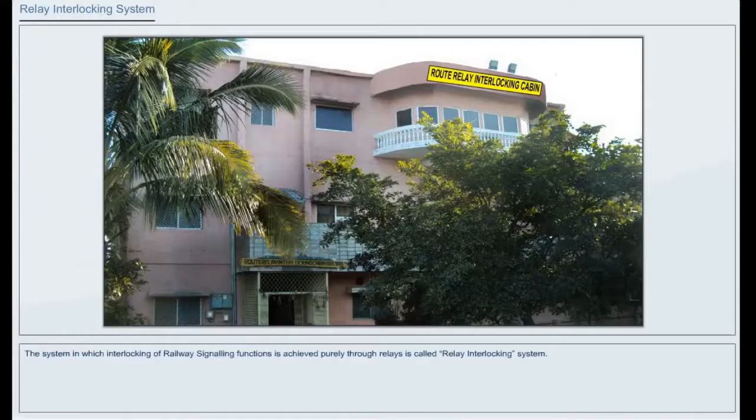A system in which interlocking of railway signaling functions is achieved purely through relays is called a relay interlocking system. Relay interlocking is to be provided as per IRS specification S36/87 Amendment Number 2.

These are classified as non-route setting type relay interlocking system, earlier known as panel interlocking or PI, and route setting type relay interlocking system, earlier known as route relay interlocking or RRI.

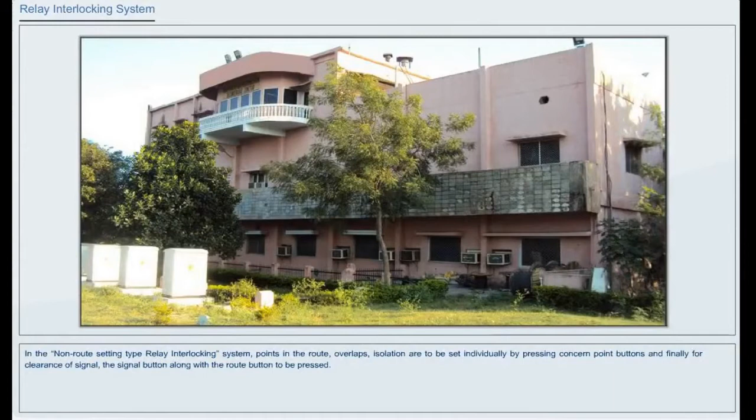In the non-route setting type relay interlocking system, points in the route, overlaps and isolation are to be set individually by pressing the concerned point buttons, and finally, for clearance of the signal, the signal button along with the route button is to be pressed.

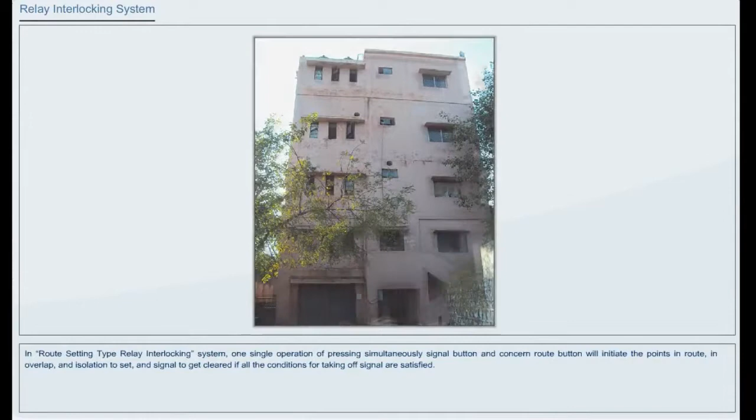In the route setting type relay interlocking system, one single operation of pressing simultaneously the signal button and the concerned route button will initiate the points in route, in overlap and isolation to set, and the signal to get cleared if all the conditions for taking off the signal are satisfied.

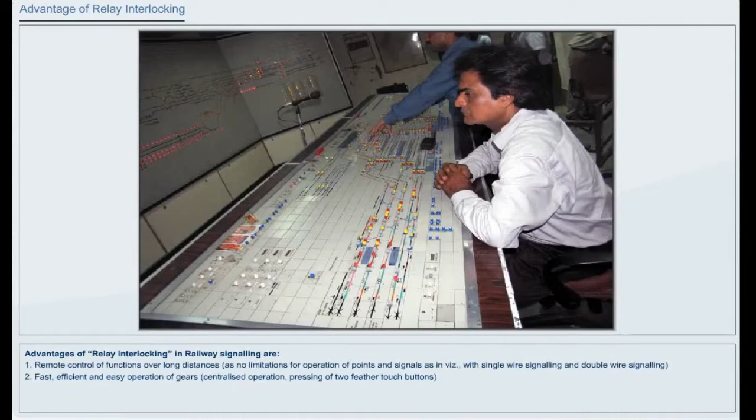Advantages of relay interlocking in railway signaling are remote control of functions over long distances, that is, there are no limitations for operation of points and signals, as vis-a-vis single wire signaling and double wire signaling. Fast, efficient and easy operation of gears, that is, for centralized operation, pressing of 2 feather touch buttons.

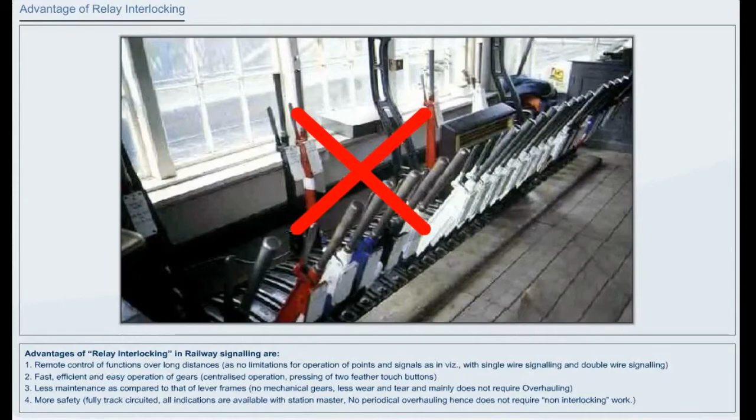Less maintenance as compared to that of lever frames. There are no mechanical gears, less wear and tear, and it mainly does not require overhauling. More safety, that is, fully track-circuited, and all indications are available with the Station Master. No periodical overhauling, hence does not require non-interlocking work.

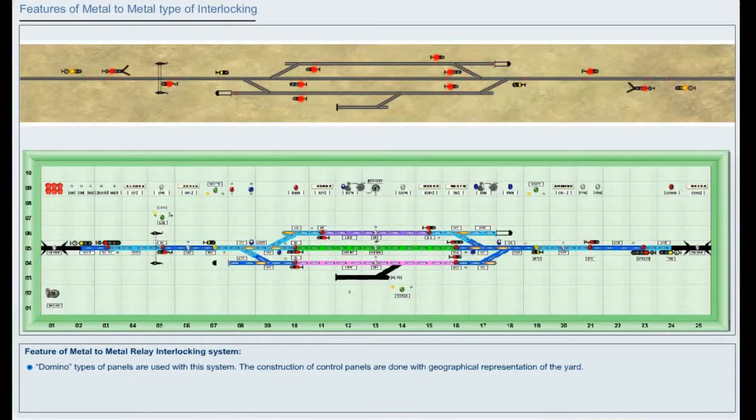Features of metal-to-metal relay interlocking system. Domino types of panels are introduced with this system. The construction of control panels is done with geographical representations of the yard by assembling small sections of domino strips fixed on a frame of suitable size.

It is based on the entrance and exit principle. The operator has to operate the signal button at the entry of the route along with the route button near its exit simultaneously. This forces the operator to face the panel and make a conscious choice of buttons. Uses self-restoring push buttons. For any vital operation, 2 buttons are to be pressed simultaneously.

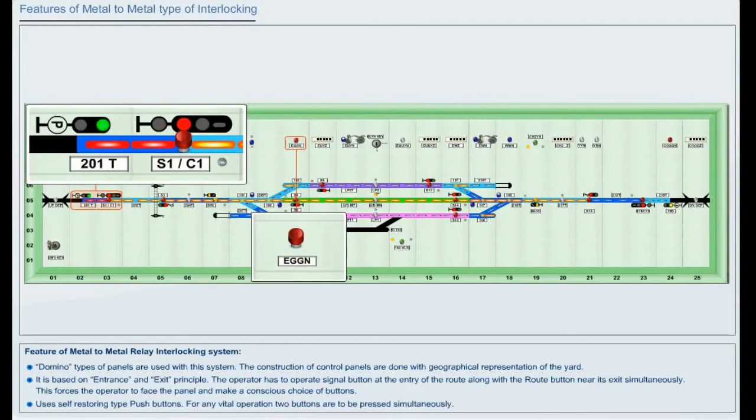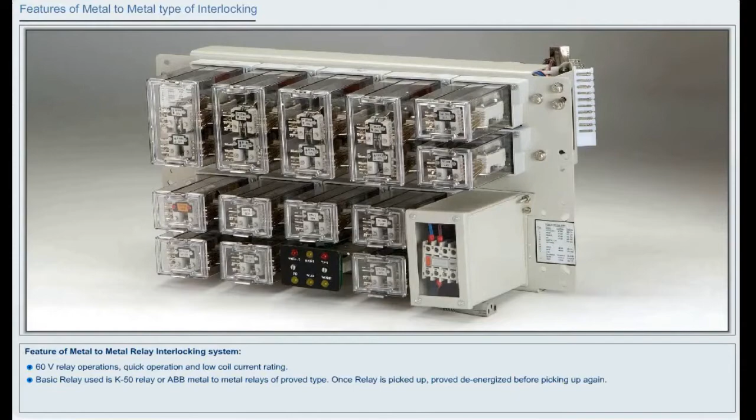60 volts relay operation, quick operation and low coil current rating. The basic relay used is the K50 relay or ABB metal-to-metal relays of proved type. Relay picked up is proved de-energized before picking up again. Uses relay groups and mechanical interlocked relays. Uses mercury type flasher relay. This is capable of working for ages.

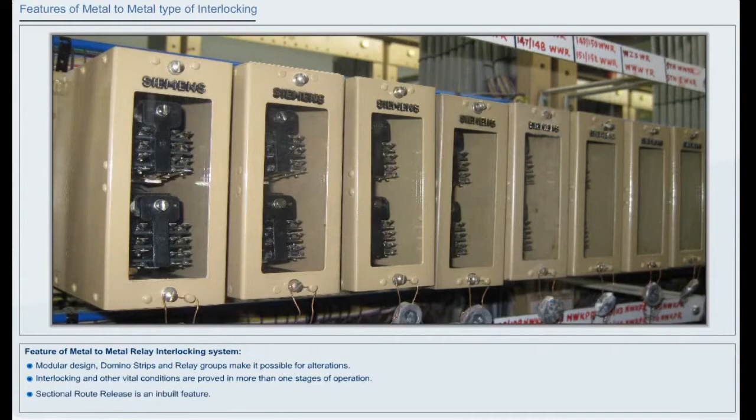Modular design, domino strips and relay groups make alterations possible. Interlocking and other vital conditions are proved in more than one stage of operation. Sectional route release is an inbuilt feature. Emergency full route release, emergency sub-route release, and emergency point operation.

Features with counters are introduced with this system. These features facilitate quicker traffic management with the help of signaling staff in times of track circuit failures. Provision of main and intermediate distribution frames for wiring connections between various relay units, relays and operating panel, as well as relays and external cables.

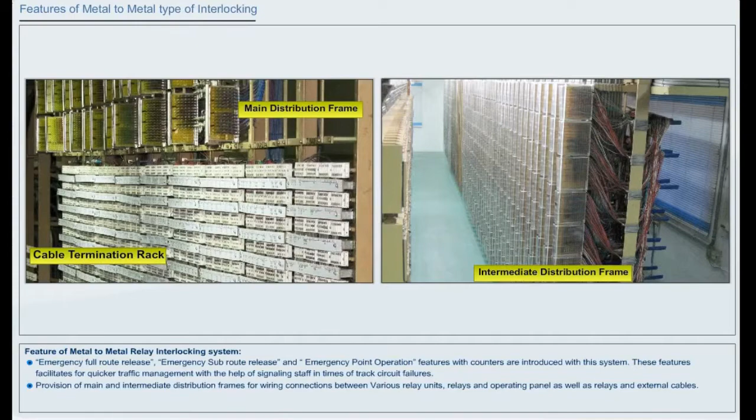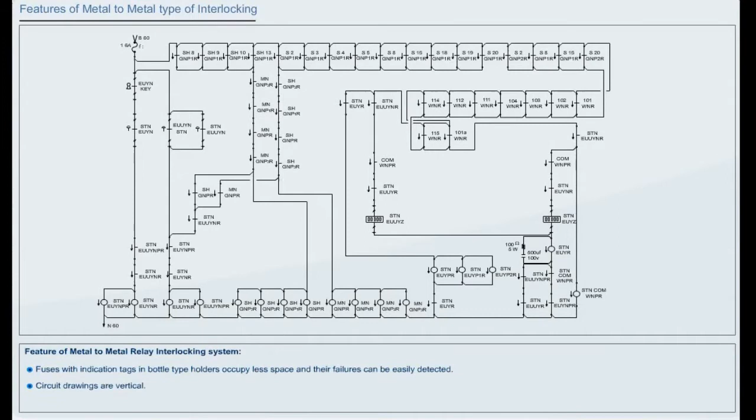All wires are terminated on tag blocks fixed on distribution frames, which saves the space required for terminations and facilitates easy identification during testing and modifications. Fuses with indication tags in bottle type holders occupy less space and their failures can be easily detected. Circuit drawings are vertical. Small in size, hence occupies less space.

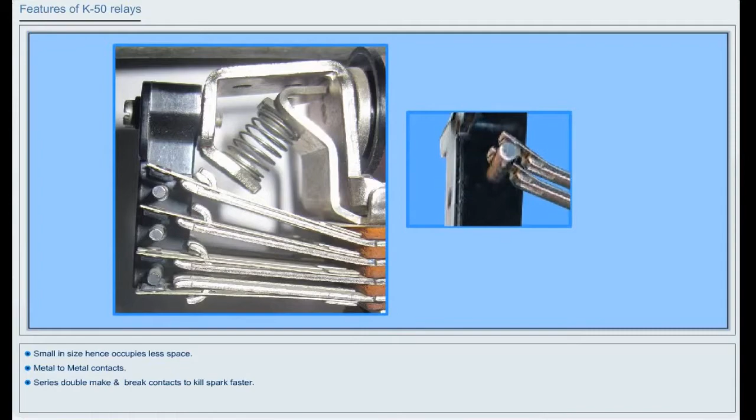Metal to metal contacts. Series double make and break contacts to kill sparks faster. Elliptical shape of contacts, hence faster heat dissipation. Fast operating time: pickup time 25 to 60 milliseconds and drop away time 15 to 25 milliseconds. Less contact resistance, 0.05 ohms, when compared to metal to carbon contact, 0.2 ohms.

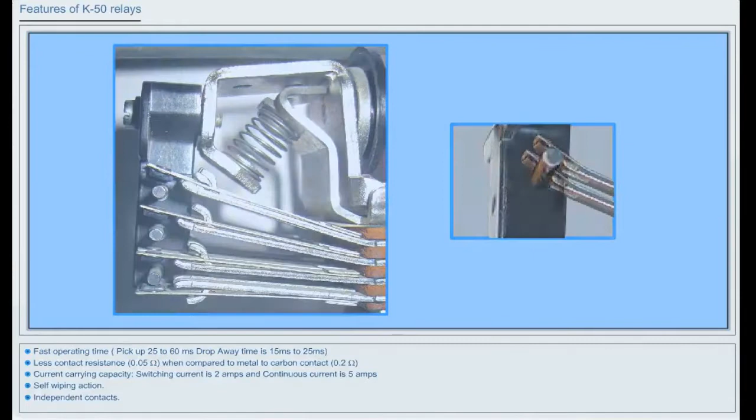Current carrying capacity: switch current is 2 amperes and continuous current is 5 amperes. Self-wiping action. Independent contacts. Code pins, 2 numbers, to prevent wrong relay insertion. Guide pins to prevent wrong direction, that is, inverted position.

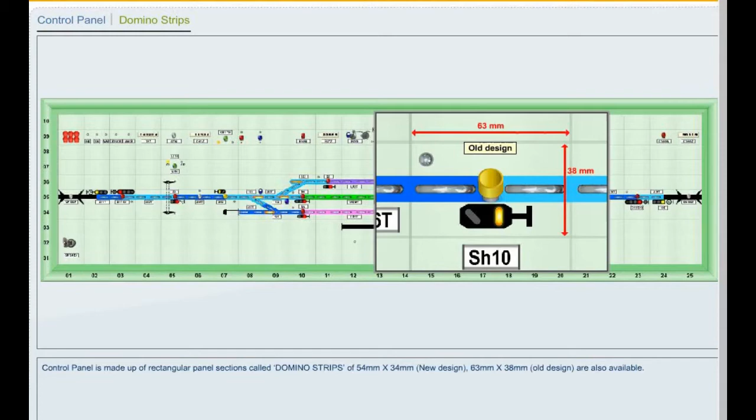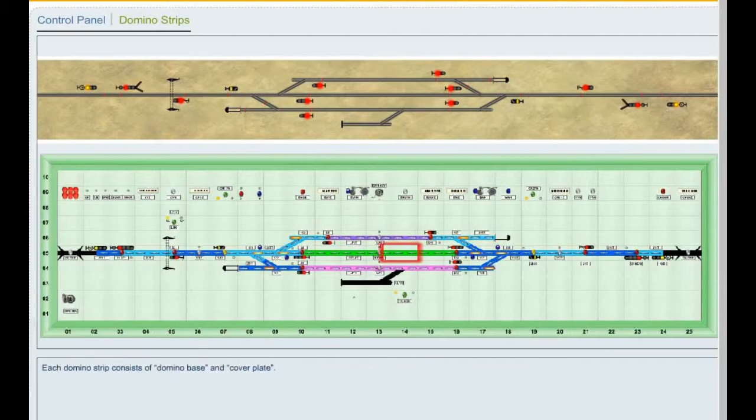The control panel is made up of rectangular panel sections called domino strips, of length 54 mm and breadth 34 mm for the new design, and length 63 mm and breadth 38 mm for the old design. Domino strips are arranged in a manner to depict the geographical layout of the yard as faced by the operator. Each domino strip consists of a domino base and cover plate.

The cover plate contains the painted yard layout portion, buttons, indications, counters and keys on top of it as required. Once all the domino strips are assembled, they will depict the complete yard layout geographically with the required buttons and others for operation. The yard layout will be painted with different colors to distinguish each track circuit portion of the yard. Usage of domino strips reduces the panel size and facilitates easy modification to suit changes in the yard from time to time.

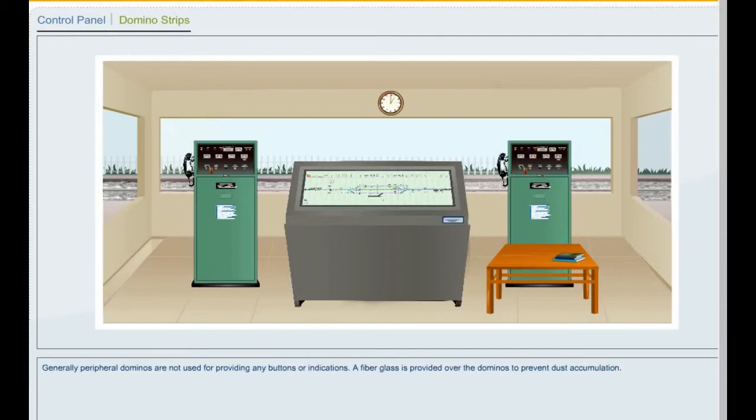Generally, peripheral dominoes are not used for providing any buttons or indications. A fiberglass cover is provided over the dominoes to prevent dust accumulation. Warning buzzers are fixed inside the panel. All the panel strip wiring is terminated on tag blocks mounted inside the panel.

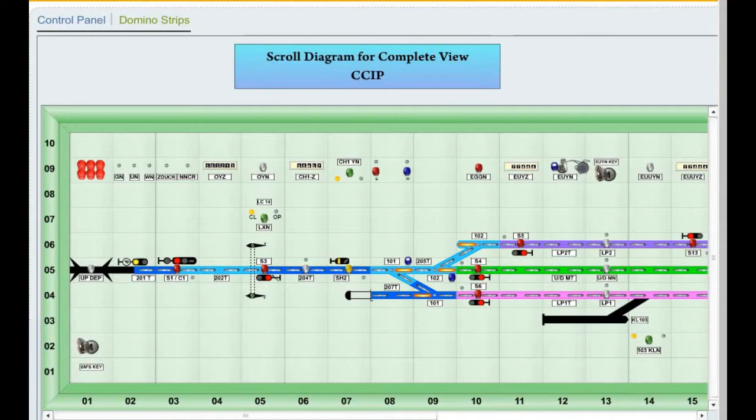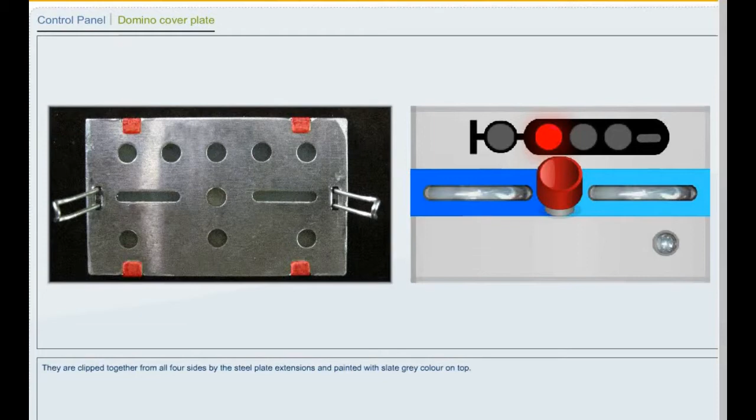It actually contains 1 steel and 2 aluminum plates. The upper plate is a steel plate and the lower 2 plates are aluminum plates. They are clipped together from all 4 sides by the steel plate extensions and painted with slate grey color on top. The top plate of the panel can be removed from its base with the help of a magnet because of its steel material.

The top plate, according to its location, may carry track, point, or signal demarcation with slit cuts to size and shape. Transparent white or green films placed between the lower 2 plates as required give the needed colors of the indications through these slits. Buttons may be fixed on the top plate in a suitable location as required. The plates can be changed or modified as per alterations effected in the yard layout at any time.

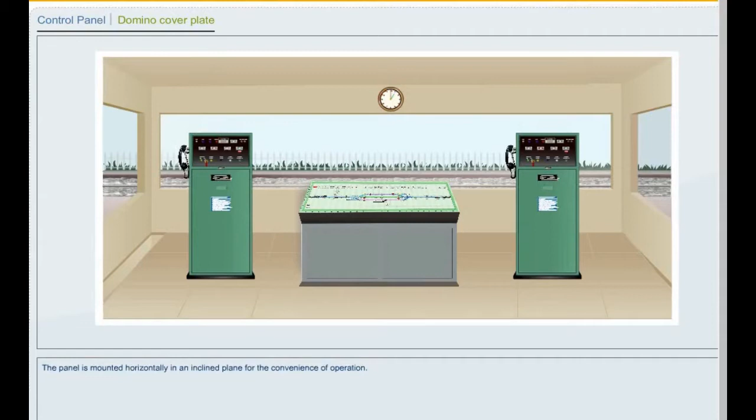The panel sections are generally assembled in multiples of 5 both horizontally and vertically as per need. The dull gray color of the panel surface eliminates undesirable reflections. The panel is mounted horizontally in an inclined plane for the convenience of operation. In case of major yards, a separate illumination diagram made up of the same sections is mounted upright above the operating panel. The operating panel may have a simple line diagram of the yard with all demarcations excluding their illuminations.

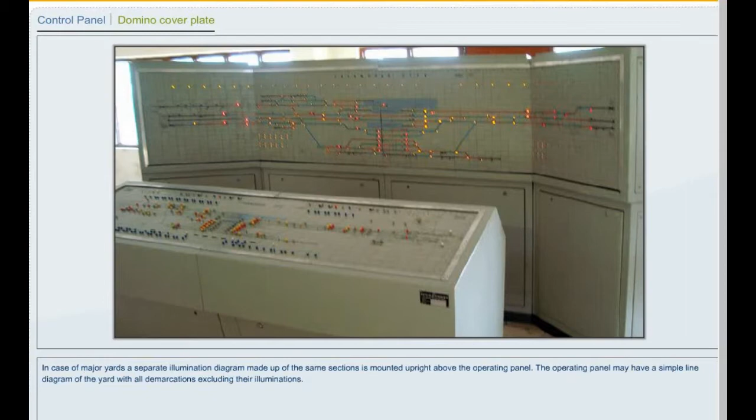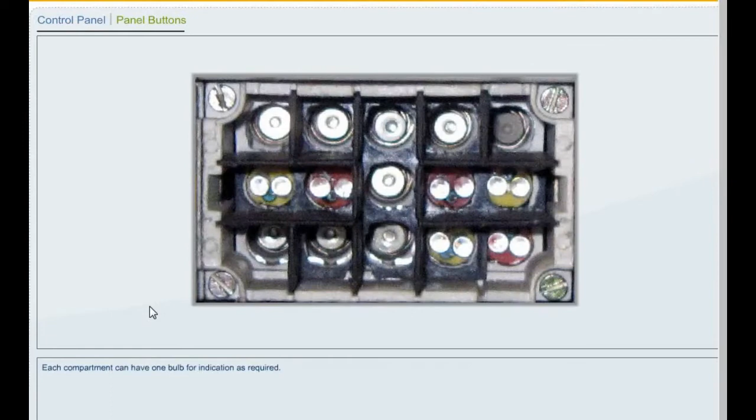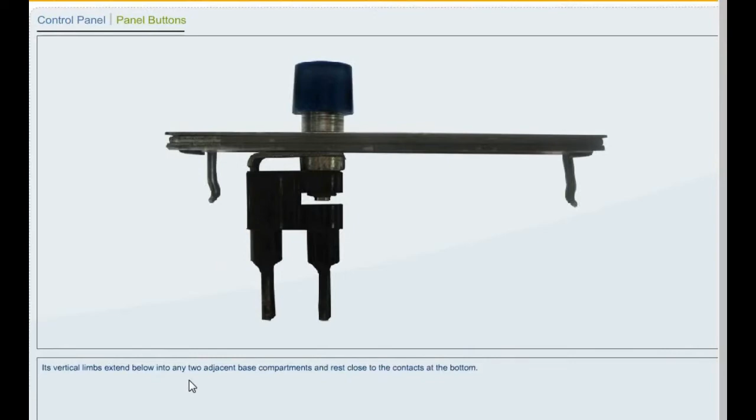A button fixed on the top plate above has a steel bridge. Its vertical limbs extend below into adjacent base compartments and rest close to the contacts at the bottom. 2 compartments are required for providing one push button for operation. These contacts are bridged when the button is pressed. The button is of self-restoring type, opening the contact normally.

All signaling functions having manual control will be operated by pressing 2 buttons simultaneously and releasing them within 10 or 15 seconds. That is, in the case of route setting interlocking, buttons shall be kept pressed till the last pair of points in the route starts operating. Main signals clear after the buttons are released, whereas shunt signal buttons shall be released after the signal has come off.

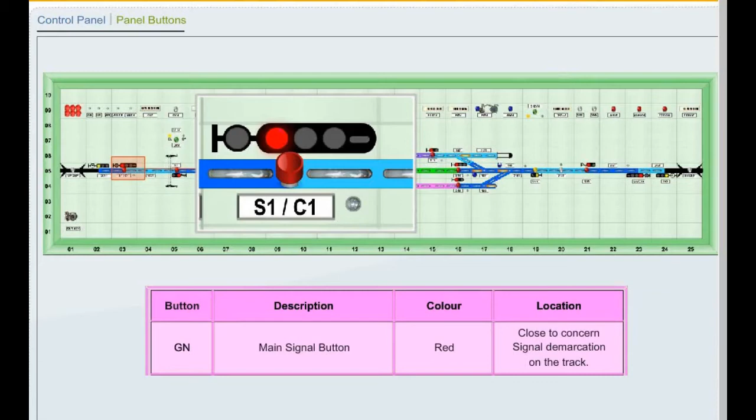GN button, that is, main signal button, which is red in color and located close to the concerned signal demarcation on the track on the control panel. SHGN button, that is, shunt signal button, which is yellow in color, is located close to the concerned signal demarcation on the track on the control panel. UN button, that is, route button, which is gray in color and located at the center of the berthing track or last control track circuit on the control panel.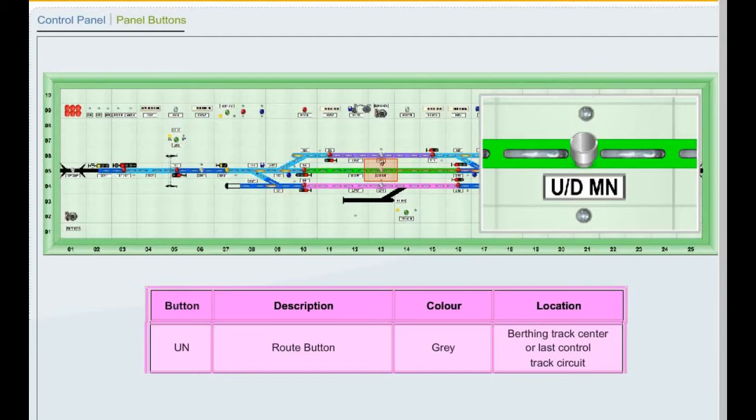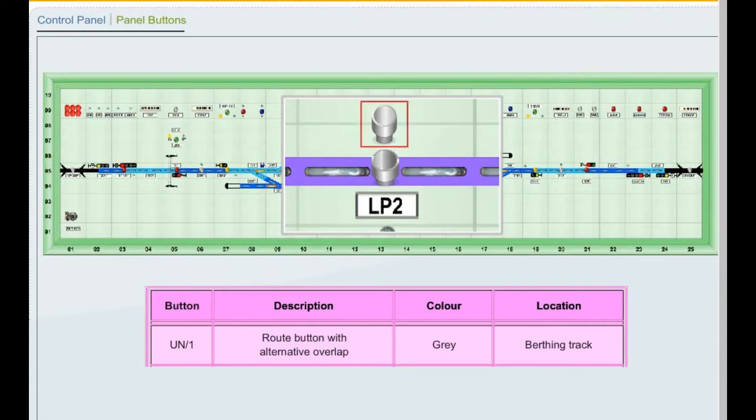UN/1 button, that is, route button with alternative overlap, which is gray in color and located at the berthing track on the control panel. WN button, that is, point button used only for point operation, which is blue in color and located close to the concerned point demarcation on the control panel. WN button, that is, point button used for point operation and also for sub-route release, which is blue with a white dot on top, is located close to the concerned point demarcation on the control panel.

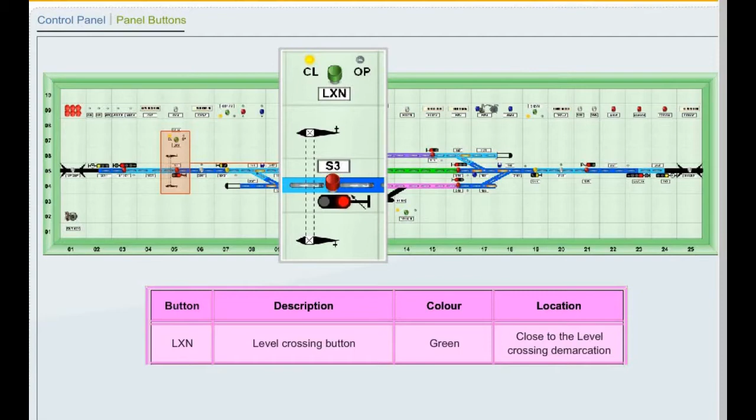LXN button, that is, level crossing button, which is green in color, is located close to level crossing demarcation on control panel. KLN button, that is Point Key Lock Release button, which is green in color, is located close to the key locked point demarcation on control panel.

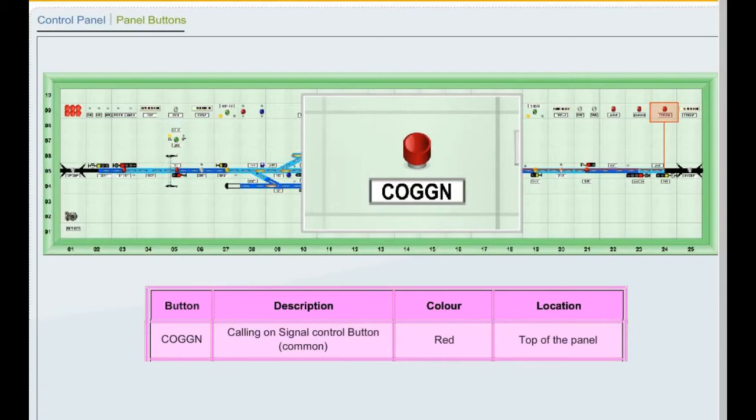COGGN button is a common calling on signal control button, which is red in color, is located at the top of the control panel. EGGN button is a common button to replace a cleared signal to on, which is red in color, is located at the top of the control panel.

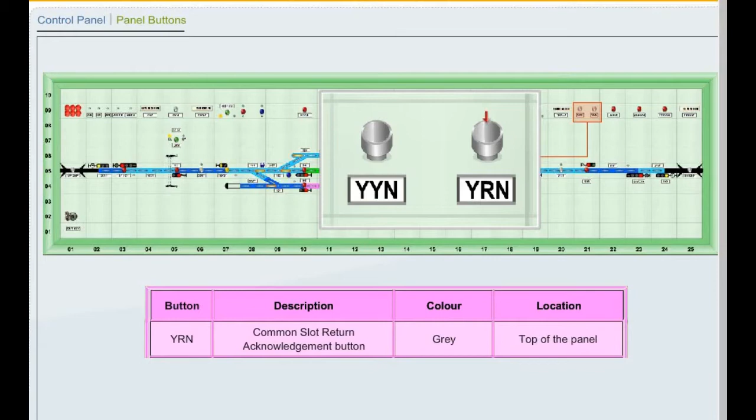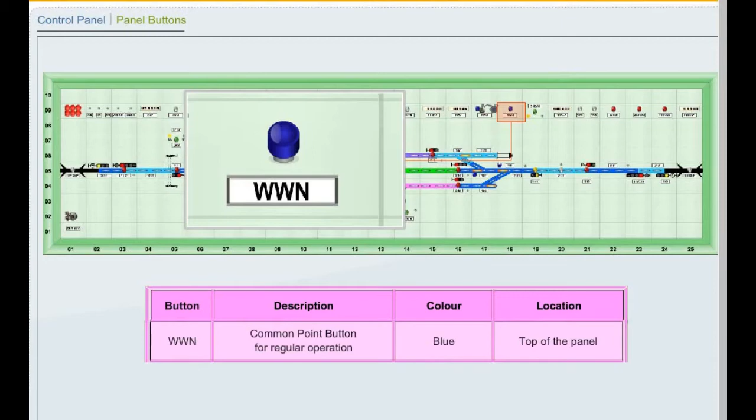YYN button is a common slot release button, gray in color, is located at the top of the control panel. YRN button is a common slot return acknowledgement button, which is gray in color, is located at the top of the control panel. WWN button is a common point button for regular operation, which is blue in color, is located at the top of the control panel.

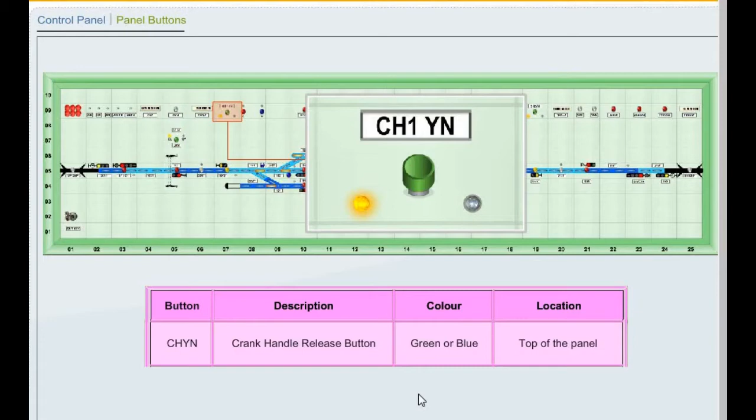EWN button is a common point button for emergency operation, which is blue in color, is located at the top of the control panel. CHYN button is a crank handle release button, which is green or blue in color, is located at the top of the control panel. CHYRN button is a crank handle slot return acknowledgement button, which is green or blue in color, is located at the top of the control panel.

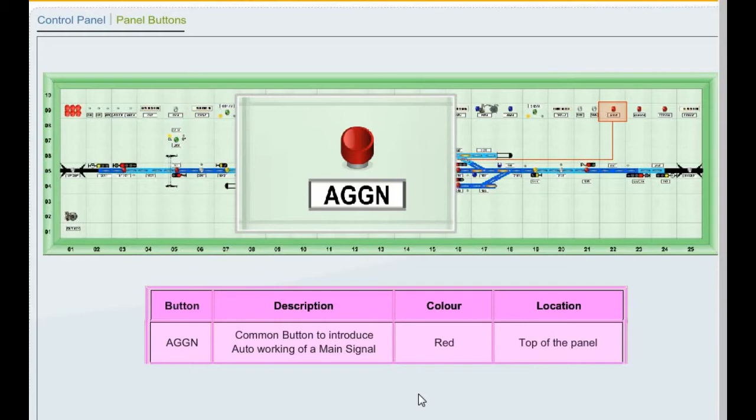AGGN button is a common button to introduce auto working of a main signal, which is red in color, is located at the top of the control panel. AGGRN button is a common button to cancel auto working of a main signal, which is red in color, is located at the top of the control panel.

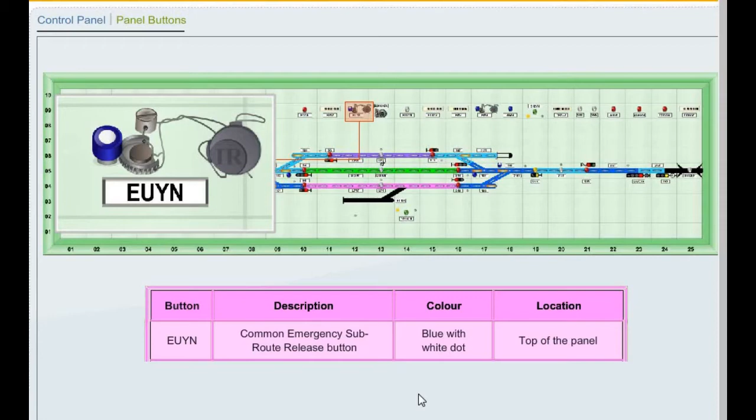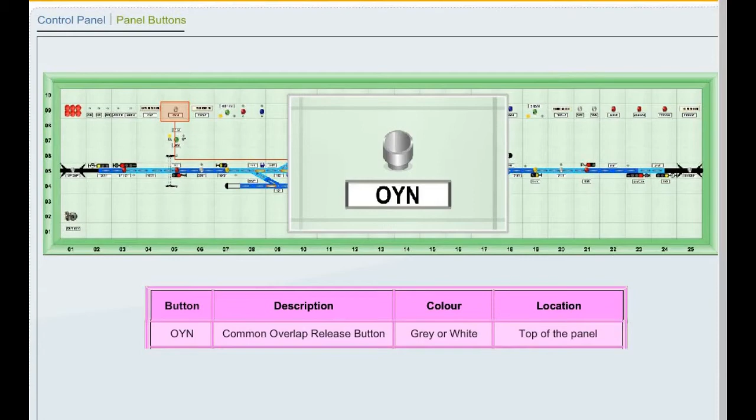EUYN button is a common emergency subroute release button, which is blue with white dot, is located at the top of the control panel. EUUYN button is a common emergency full route release button, which is gray in color, is located at the top of the control panel. OYN button is a common overlap release button, which is gray or white in color, is located at the top of the control panel.

GXYN button is a signal lamp failure alarm acknowledge release button, which is red in color, is located at the top of the control panel. WXYN button, point detection failure alarm acknowledge button, which is blue in color, is located at the top of the control panel.

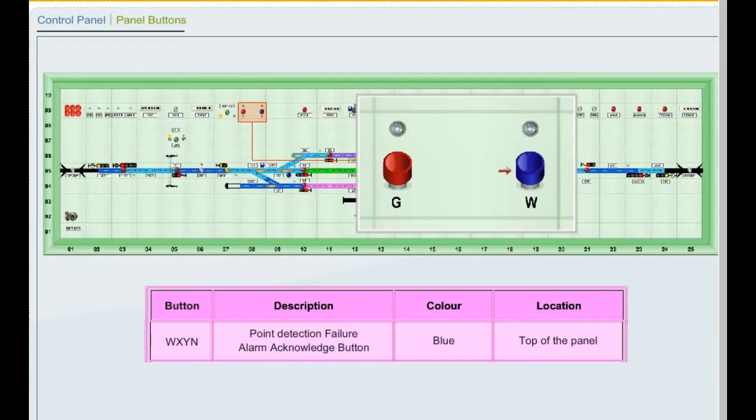Day button is a signal lamp voltage control button for daytime lighting, which is white or gray in color, is located at the top of the control panel. Night button is a signal lamp voltage control button for nighttime lighting, which is white or gray in color, is located at the top of the control panel. 1, 2 buttons are panel lamp voltage control buttons for 2 stages of light intensity, which are gray or white in color, provided for bright and dim indication on the control panel.

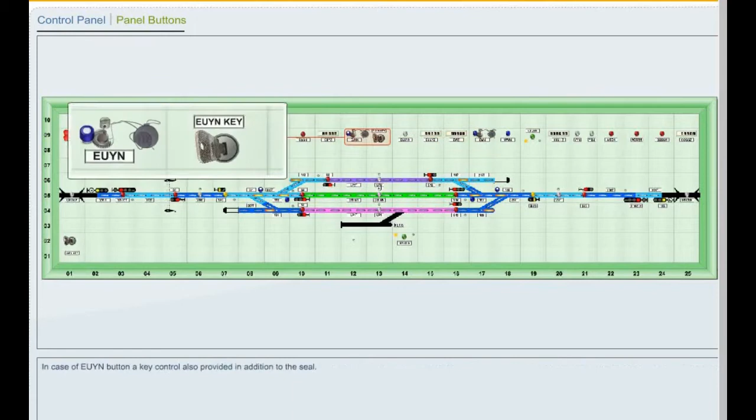Buttons EWN and EUYN are normally obstructed for operation by a sealed disc below the button. Before operation, seal has to be broken, seal wire to be removed, and the disc below the button turned to free it by the operator. In case of EUYN button, a key control is also provided in addition to the seal. After each operation, the operator has to get resealing done on the disc by the signaling staff.

Station Master Key, SM key. It enables the provision for authorized operation of the panel. This key is with the on-duty station master. When the SM's key is out, no operation is possible on panel except throwing the clear signal to on position. Emergency subroute cancellation key, EUYN key. This key is kept in custody of on-duty signal engineer or technician. Without this key, emergency subroute cancellation is not possible.

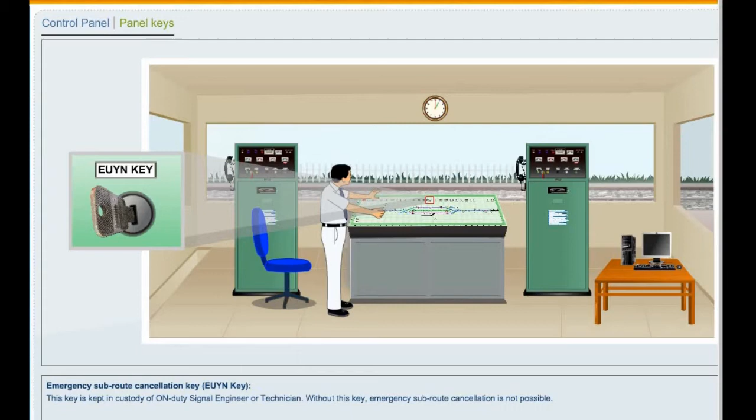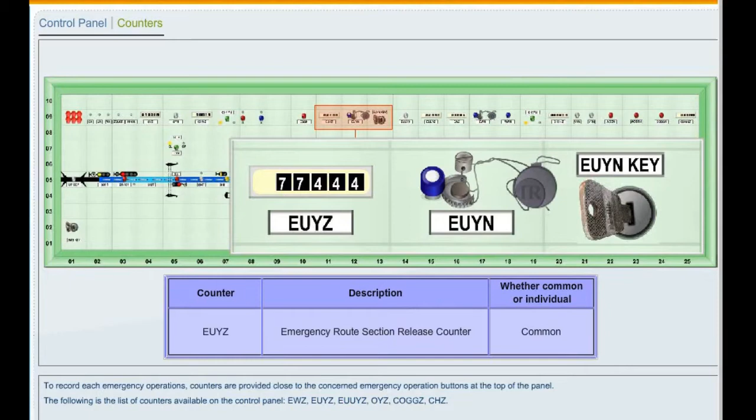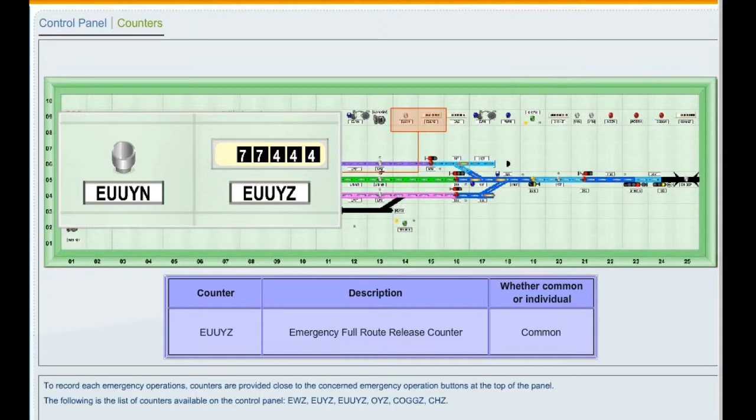To record each emergency operation, counters are provided close to the concerned emergency operation buttons at the top of the panel. The following counters are available on the control panel. EWZ counter, known as Emergency Point Operation Counter. EUYZ counter, known as Emergency Route Section Release Counter. EUUYZ counter, known as Emergency Full Route Release Counter. OYZ counter, known as Overlap Release Counter.

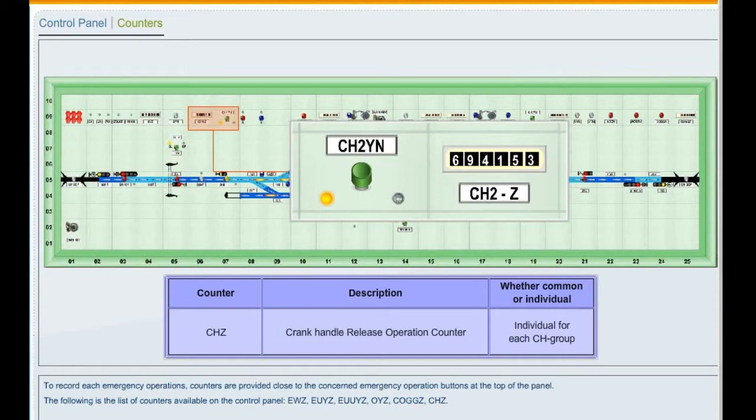COGGZ counter, known as Calling On Signal Operation Counter. CHZ counter, known as Crank Handle Release Operation Counter, is individual for each crank handle group. Some panels do not have OYN. In its place, EUUYN is utilized instead of OYN.

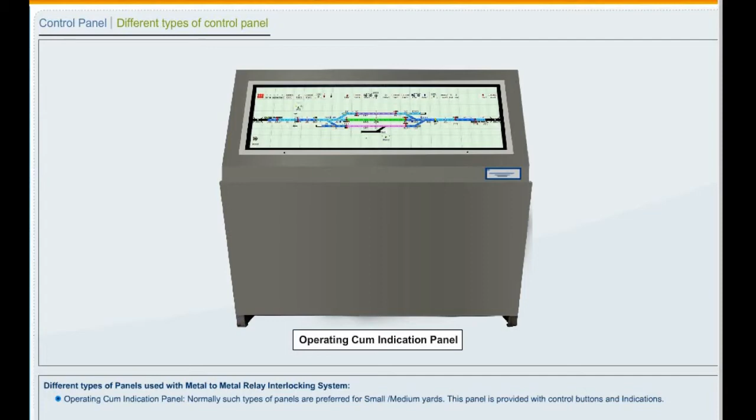Different types of control panels used with metal-to-metal relay interlocking system are operating-cum-indication panel. Normally, such types of panels are preferred for small or medium yards. This panel is provided with control buttons and indications. Indication panel, operating panel, maintenance panel.

Normally, such types of panels are preferred for bigger yards. Indication panel is provided for clear visibility of indications. In bigger yards, it is provided vertically in a semi-hexagonal shape to cover visually more area in a short span.

It is associated with a separate operating panel located in between the indication panel and the operator. It is provided with buttons, keys, counters, etc. used for operation on a simple and relatively small line diagram of the yard.

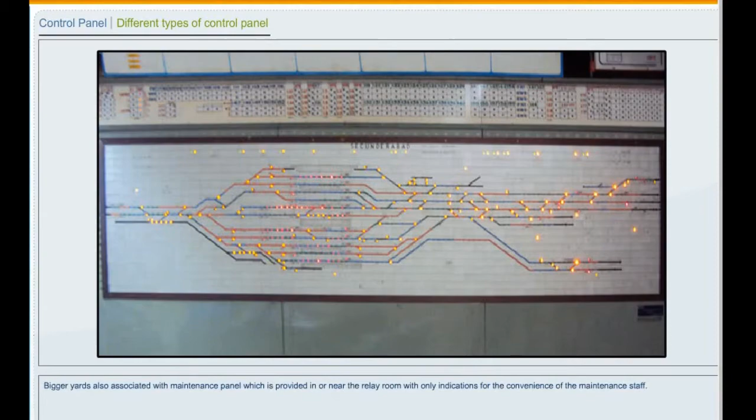Bigger yards are also associated with a maintenance panel, which is provided in or near the relay room with only indications for the convenience of the maintenance staff. Control panel with indication lamps. In this panel, its indications are illuminated with indication lamps or LED lamps.

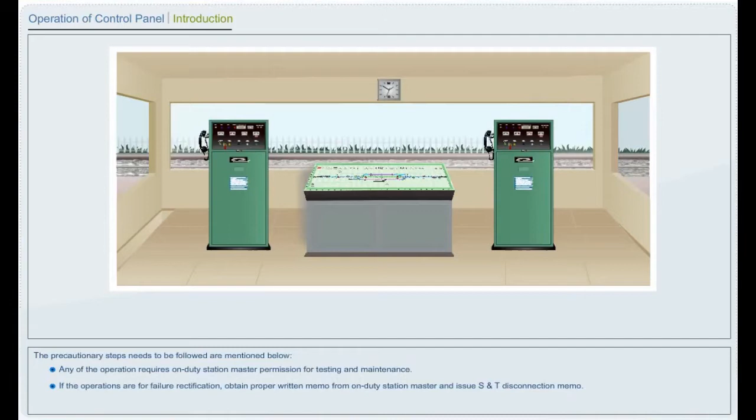Introduction. The precautionary steps that need to be followed are: any of the operations requires on-duty station master permission for testing and maintenance. If the operations are for failure rectification, obtain a proper written memo from the on-duty station master and issue an S&T disconnection memo. For any operation, ensure the SM key is in.

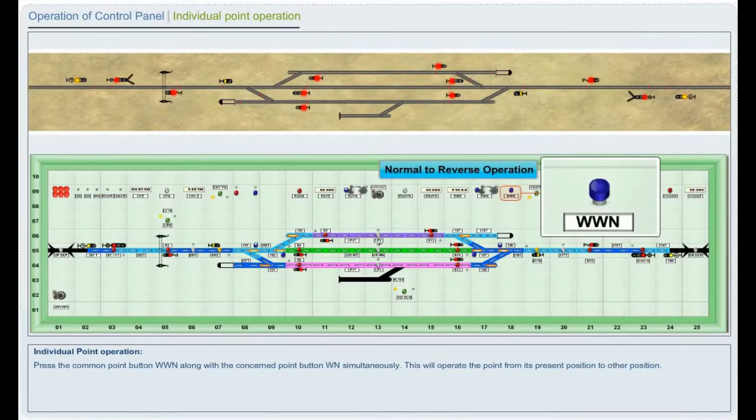Individual point operation. The procedure that needs to be followed for individual point operation is: press the common point button WWN along with the concerned point button WN simultaneously. This will operate the point from its present position to the other position. Now, press again the common point button WWN along with point button WN to operate the point from reverse position to normal position.

Emergency point operation. The steps that need to be followed for emergency point operation are: Step 1. When the point zone track circuit has failed, after ensuring non-occupation of track circuits, break the seal on the disk beneath the emergency point operation button EWN and turn it to free EWN.

Step 2. Press the emergency point operation button EWN along with the concerned point button WN and release to operate points from present position to reverse position. Step 3. Press the emergency point operation button EWN along with the concerned point button WN and release to operate the point from one position to the other. During every emergency point operation, counter EWZ will register this operation by increasing by one number.

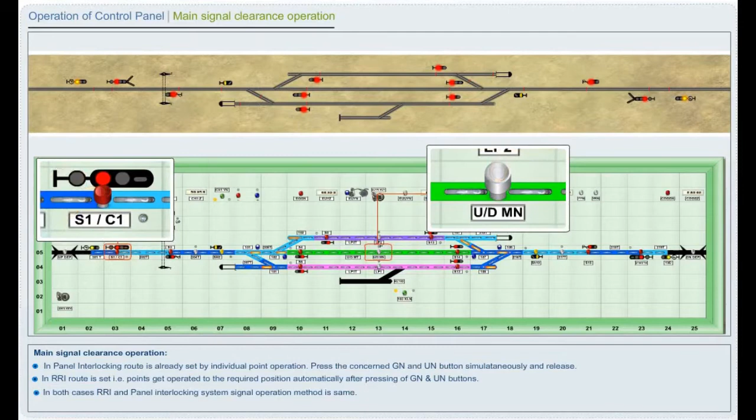Main signal clearance operation. The procedure that needs to be followed for main signal clearance operation is: in panel interlocking PI, the route is already set by individual point operation. Press the concerned signal button GN and route button UN simultaneously and release. In route relay interlocking RRI, the route is set, that is, points get operated to the required position automatically after pressing of GN and UN buttons. In both cases, RRI and panel interlocking system, the signal operation method is the same.

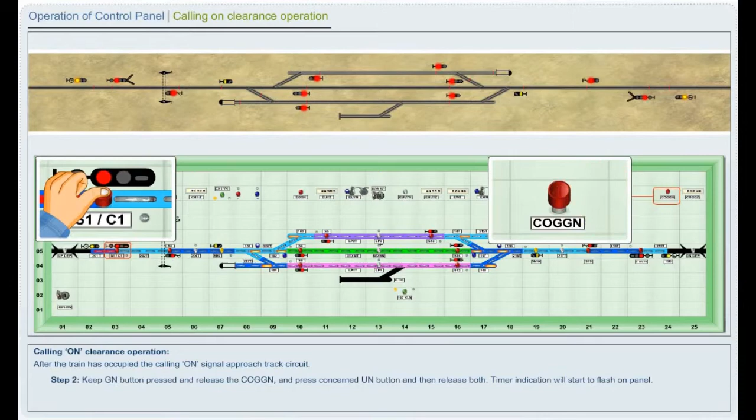Calling on signal clearance operation. The steps that need to be followed for calling on clearance operation are: Step 1. After the train occupies the calling on signal approach track circuit, press signal button GN along with calling on signal button COGGN. Step 2. Keep signal button GN pressed, release the calling on signal button COGGN, press the concerned route button UN and then release both. Timer indication will start to flash on the panel.

Step 3. After 120 seconds, the timer indication disappears and the calling on signal off indication appears. This calling on operation is registered by the counter COGGZ.

Shunt signal clearance operation. The procedure that needs to be followed for shunt signal clearance operation is: press the concerned shunt signal button SH GN and concerned route button UN simultaneously and release. The shunt signal gets cleared before the buttons are released. In both cases, route relay interlocking and panel interlocking, the operation method is the same. In panel interlocking PI, the route is already set by individual point operation, and in route relay interlocking RRI, the route is set after pressing of signal button GN and route button UN.

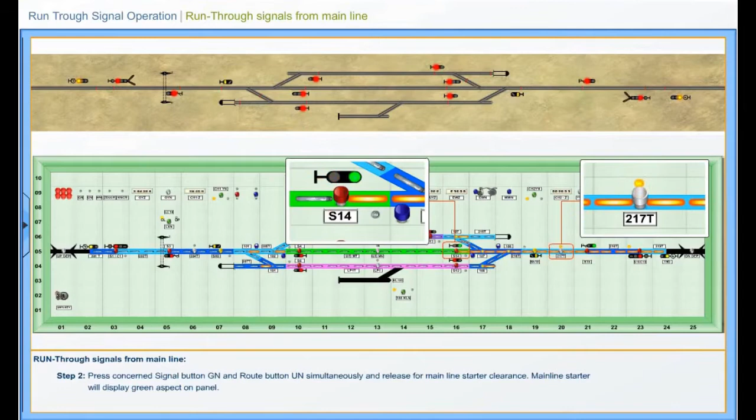Run-through signals from main line. Run-through signals are possible only after obtaining line clear from the advanced block section. Step 1. Press the concerned signal button GN and route button UN simultaneously and release for advanced starter clearance. The advanced starter will display green aspect on the panel. Step 2. Press the concerned signal button GN and route button UN simultaneously and release for main line starter clearance. The main line starter will display green aspect on the panel.

Step 3. Press the concerned signal button GN and route button UN simultaneously and release for home signal clearance. The home signal will display green aspect on the panel. Once the home signal displays green aspect, the distant signal will change to green aspect. All the above three signals will display green aspect. It is called through signals via main line.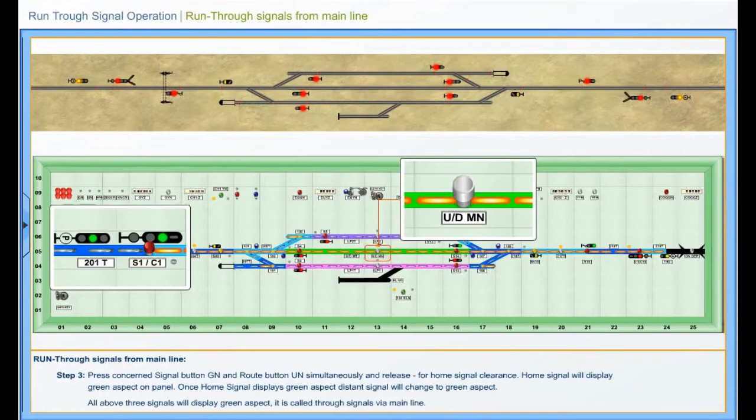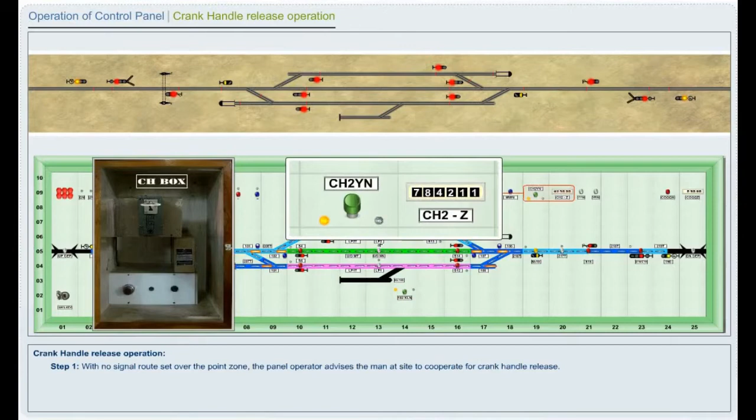Crank handle release operation. The steps that need to be followed for crank handle release operation are: Step 1. With no signal route set over the point zone, the panel operator advises the man at site to cooperate for crank handle release. Step 2. At site, a push button on the crank handle key lock relay box is pressed by an authorized person. Then the white indication near crank handle release button CHYN on the panel extinguishes and a red indication flashes on the panel.

Step 3. The operator now presses crank handle release button CHYN along with the common slot release button YYN simultaneously. Step 4. A steady red LED indication appears on the crank handle key lock relay box. Then the key is extracted. The steady red LED indication on the box remains. The above crank handle slot operation is registered by the concerned crank handle counter, that is, the CHZ counter.

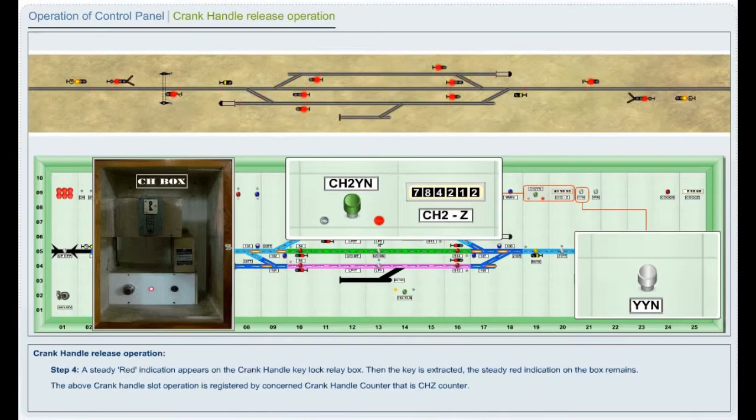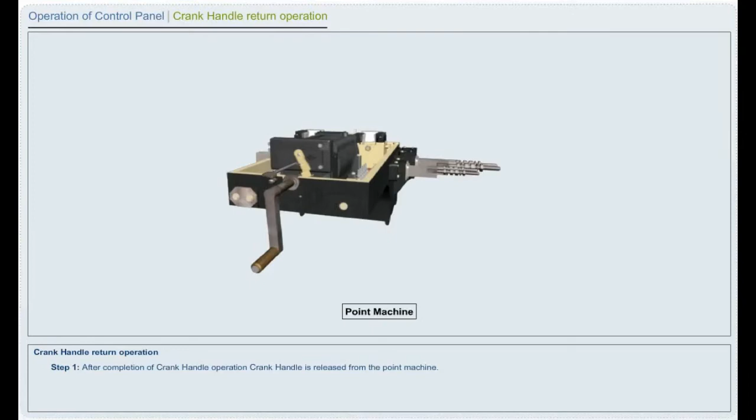Crank handle return operation. The steps that need to be followed for crank handle return operation are described below. Step 1. After completion of crank handle operation, crank handle is released from the point machine. Step 2. Key is reinserted in the crank handle relay box and it gets locked. Crank handle red indication disappears and crank handle white indication starts to flash on panel near CHYN button.

Step 3. Seeing this, the panel operator has to press CHYN along with common slot return button YRN simultaneously and release. Step 4. The flashing white indication will become steady.

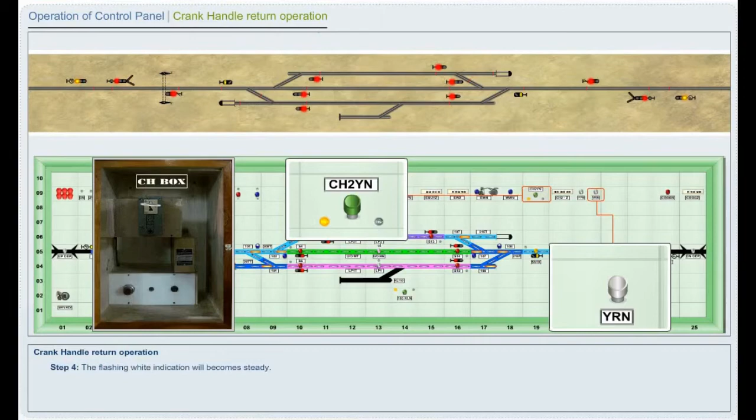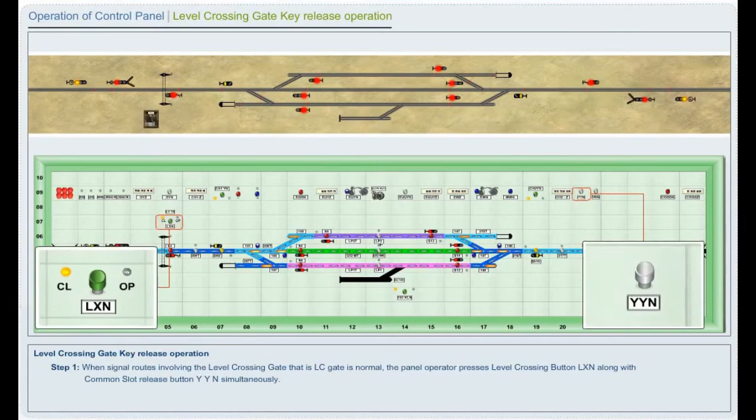Level crossing gate key release operation. The steps that need to be followed for gate slot release operation are: Step 1. When signal routes involving the level crossing gate, that is LC gate, are normal, the panel operator presses level crossing button LXN along with common slot release button YYN simultaneously. Step 2. The steady white indication near level crossing button LXN on the panel starts flashing.

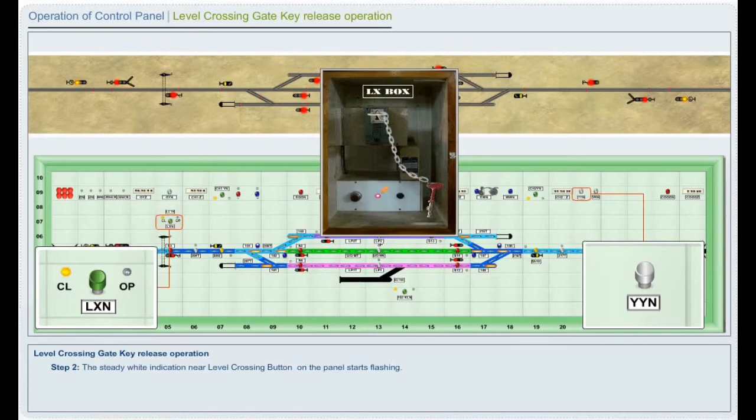Step 3. A steady red indication appears on the level crossing key lock relay box at site. Step 4. When the push button on the box is pressed, the key lock relay picks up and releases the key. Step 5. When the key is extracted, the steady red LED indication on the box remains.

Level crossing gate key return operation. The steps that need to be followed for gate slot return operation are: Step 1. The flashing white indication near LC gate button on the panel disappears and a flashing red indication appears. Step 2. After the LC gate is closed, when the key is reinserted in the key lock relay and turned, the relay drops. The flashing red indication at level crossing gate button on the panel disappears and the flashing white indication reappears.

Step 3. On seeing this, the panel operator presses level crossing button LXN along with slot return button YRN simultaneously. The slot gets withdrawn and the white indication becomes steady. At site, the red LED indication on the box now disappears.

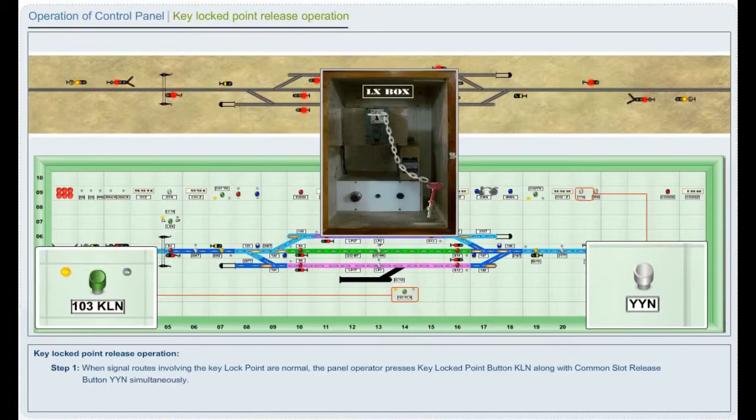Key lock point release operation. The steps that need to be followed for key lock point release operation are: Step 1. When signal routes involving the key locked point are normal, the panel operator presses key locked point button KLN along with common slot release button YYN simultaneously. Step 2. The steady white indication near key locked point button on the panel starts flashing.

Step 3. A steady red LED indication appears on the key locked point relay box at site. Step 4. When the push button on the box is pressed, the key lock relay picks up and releases the key. The flashing red indication appears near key locked point button on the panel. When the key is extracted, the steady red LED indication on the box remains.

Key lock point return operation. The steps that need to be followed for key lock point return operation are: Step 1. After the LC gate is closed, when the key is reinserted in the key lock relay and turned, the relay drops. Step 2. The flashing red indication at key locked point button on the panel disappears and the flashing white indication

reappears. Step 3. On seeing this, the panel operator presses key locked point button KLN along with slot release button YRN simultaneously. The slot gets withdrawn and the white indication becomes steady. At site, the red LED indication on the box now disappears. Station master key, that is, SM key in, is not necessary for this operation.

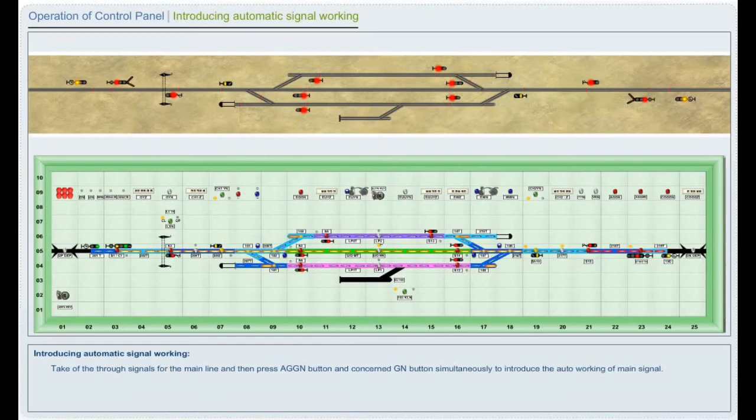Cancellation of automatic signal working. The procedure that needs to be followed for cancellation of automatic signal working operation is: press the AGGRN button and concerned GN button simultaneously to cancel the auto working of main signal.

Acknowledgement of signal failure. The procedure that needs to be followed for acknowledgement of signal failure is: whenever any signal is blank, S indication along with buzzer will appear on the panel. Press the GXYN button to acknowledge this signal failure. Buzzer will be stopped, but indication will continue till it is set right.

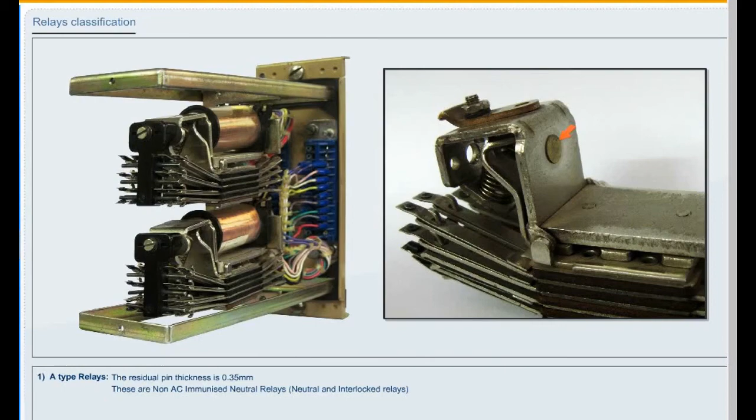K50 relays. Classification on the basis of thickness of residual pin. The increase in residual pin thickness increases the sensitivity of the relay. A-type relays: the residual pin thickness is 0.35 millimeters. These are non-AC immunized neutral relays, neutral and interlocked relays. B-type relays: the residual pin thickness is 0.15 millimeters. These are AC immunized neutral relays.

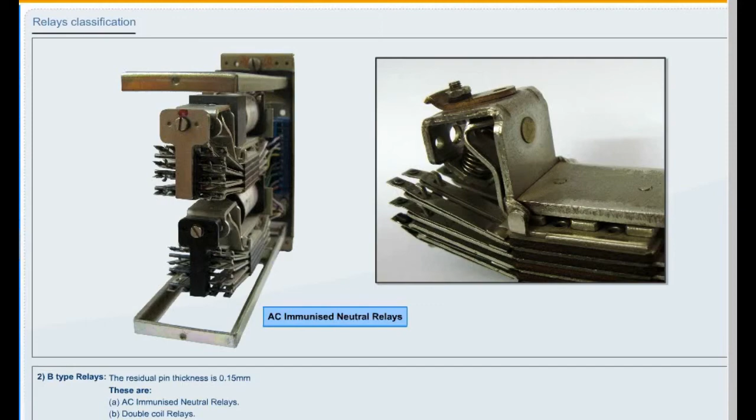Double coil relays, UECR. E-type relays: the residual pin thickness is 0.45 millimeters. These are on ECR, RECR, off ECR, DECR.

K50 relays are proved type metal-to-metal contact relays. These are provided with maximum 8 independent contacts. These relays are available with different contact configurations. General configurations for neutral and interlocked relays are 4F 4B, 5F 3B, 6F 2B.

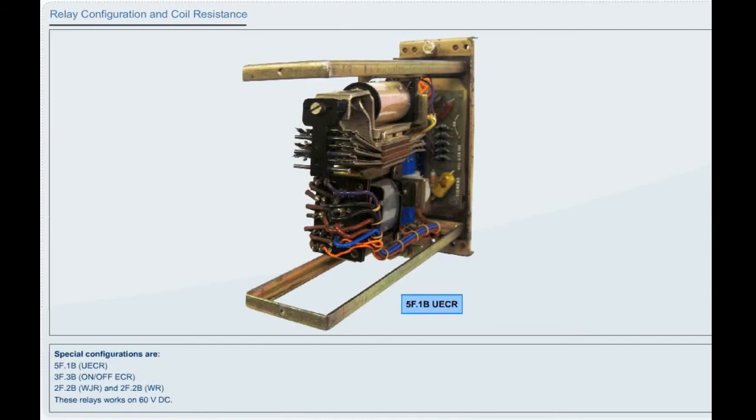Special configurations are 5F 1B UECR, 3F 3B on and off ECR, 2F 2B WJR, and 2F 2B WR. These relays work on 60 volt DC.

The following table shows the non-AC immunized neutral relay type with contact configuration 4F 4B having relay coil resistance 1260 ohms, contact configuration 5F 3B having 1260 ohms, and 6F 2B with relay coil resistance 1840 ohms.

In interlocked relay type with contact configuration 4F/4B, 5F/3B, 6F/2B, having relay coil resistance of 615 ohms. In AC immunized relay for both top and bottom relays, type has contact configuration 5F/3B, having relay coil resistance of 1840 ohms. In AC immunized relay with top AC immunized and bottom non-AC immunized relay with contact configuration 5F/3B, having relay coil resistance

1840 ohms. In double coil relays type Z1WR1, Z1NWR, Z1RWR, WKR3, Z1WR, and WLR, having relay coil resistance of 1340 ohms in first coil and 1590 in second coil. In UECR relay type with contact configuration 5F1B having relay coil resistance of 64.1 ohms. In on-ECR relay type with contact configuration 3F3B having relay coil resistance of 64.1 ohms. In off-ECR relay type with contact configuration 3F3B having relay coil resistance of 64.1 ohms.

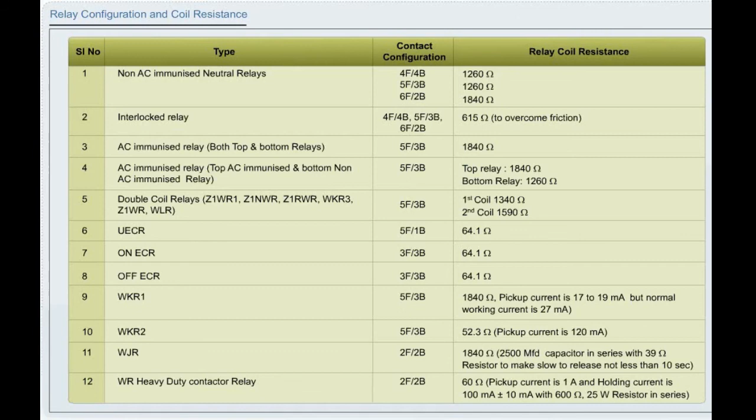Numbering. Relay coils and contacts are numbered as follows. In top relay, the terminal numbers 1 and 2 are spare. The terminal numbers 11 and 12 are used for top relay contact number 02. The terminal numbers 21 and 22 are used for top relay contact number 03. The terminal numbers 31 and 32 are used for top relay contact number 04. The terminal numbers 41 and 42 are used for top relay contact number 05.

The terminal numbers 51 and 52 are used for top relay contact number 15. The terminal numbers 61 and 62 are used for top relay contact number 14. The terminal numbers 71 and 72 are used for top relay contact number 13. The terminal numbers 81 and 82 are used for top relay contact number 12. The terminal numbers 91 and 92 are used for top relay coils.

In bottom relay, the terminal numbers 03 and 04 are spare. The terminal numbers 13 and 14 are used for bottom relay contact number 02. The terminal numbers 23 and 24 are used for bottom relay contact number 03. The terminal numbers 33 and 34 are used for bottom relay contact number 04. The terminal numbers 43 and 44 are used for bottom relay contact number 05.